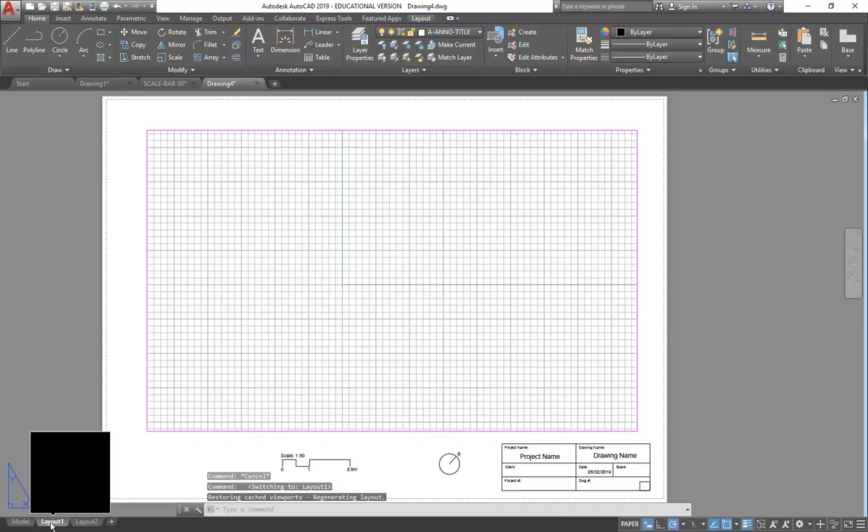Okay, so I've begun my new file with my new template, and so now I'm going to start drawing some objects back in model space. Just so it's clear, I've got the page set up for my template, but now coming back to the model tab, and because we're drawing in model, it'll be one-to-one.

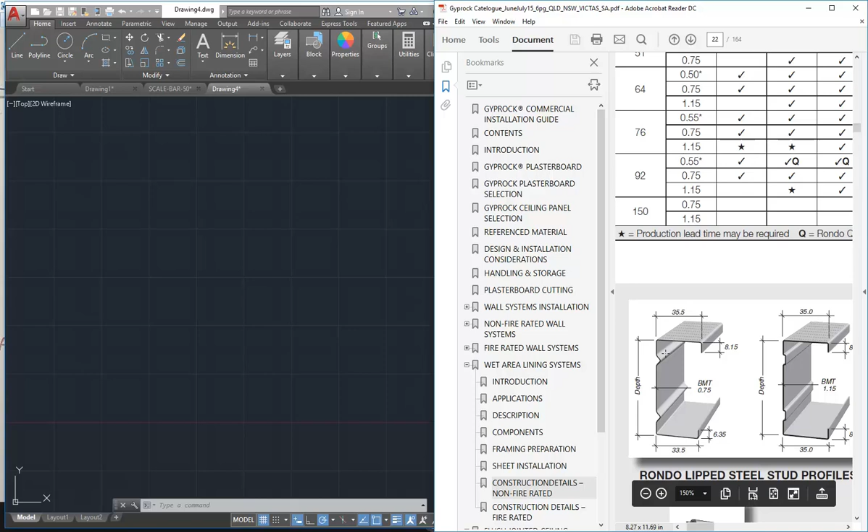Just so I can see what I'm drawing on the screen, I've got AutoCAD open, I'm just rearranging my windows there, and I want to get this stud profile that we've got that I'm going to draw so I can see it, and I'm going to again use that 76 mil deep stud profile.

So I'm zooming in a little bit around that origin, and maybe I'll begin by making sure I've got a layer for this. We'll call it - we've got a wall stud already, actually that's fine, but I'll make another one, a wall stud PBD, right, for plasterboard, and I'll just make that a colour that'll stand out.

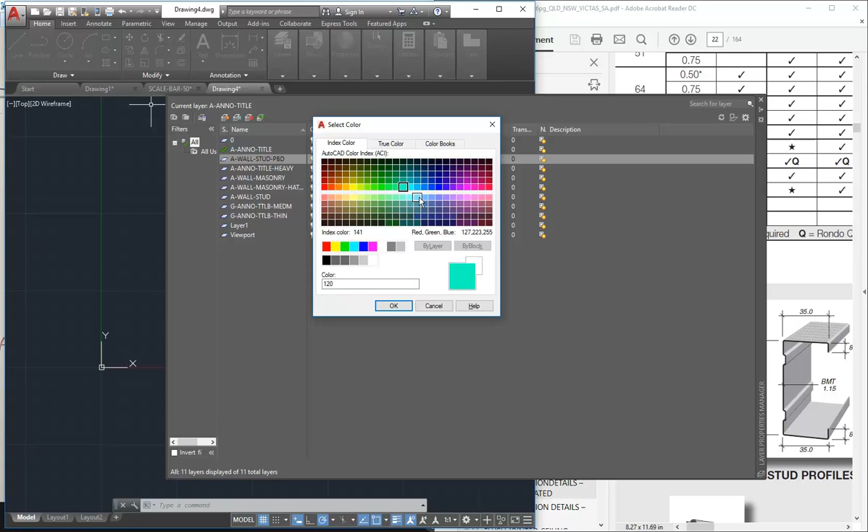Always forget the colour for plasterboard. It's one of these colours, I think, lavender or something. And then the line weight 0.35 should be fine. So that's enough for my studs and my stud wall.

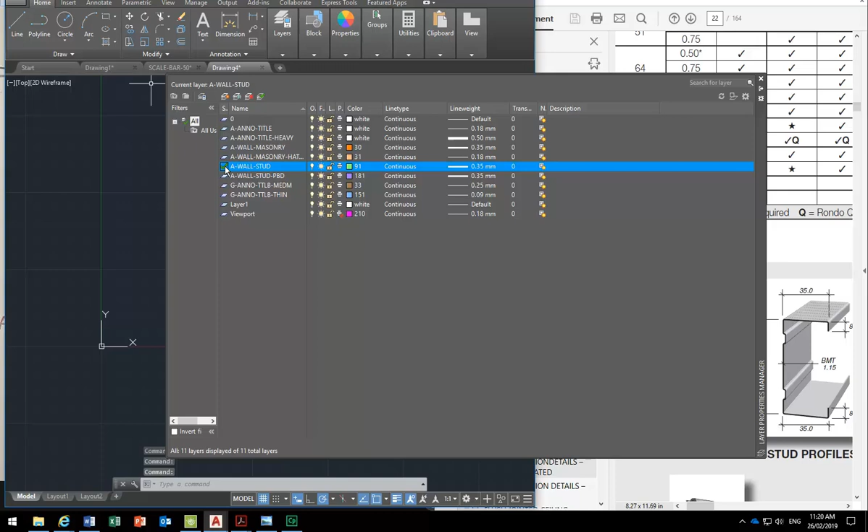And I'm going to change the wall stud layer to draw my frame. Yep, a little bit now. So, okay, I'm going to draw this profile and then make that into a block and add the lining to it. So I'll draw maybe I'll start with a rectangle, again just to keep it simple.

Click a start point and then type in the overall size that I want. So it's 76, comma, 33.5. Now, that's fine, it's the size it needs to be. So whenever you're drawing here, you're drawing one-to-one, in other words, the real size of your object, not worrying about the scale of the drawing.

And then the thickness of this, if we wanted to be technical, we could put that in, but you can see it's 0.55 of a millimetre. So there's no point drawing that in, up to 1 millimetre. Our line weight will be thicker than that, so there's no need to draw things that are that thin, anything less than a millimetre.

Do you still follow the convention of putting in section that's thicker than the rest? Oh yes, so that's right, thicker line weight. So we'll have a thicker line weight for this layer, and I already have 0.35. For details, I might make that line weight a little bit heavier, that's all.

Yes, I'm going to check that that's the right layer. So this is, no, that's actually the right layer, so that's the one I want to use. I've got another layer for the plasterboard. We can call this a wall stud metal if we wanted to. So, it's a steel stud, in case you're wondering - it could be aluminium in some rare cases, but generally steel.

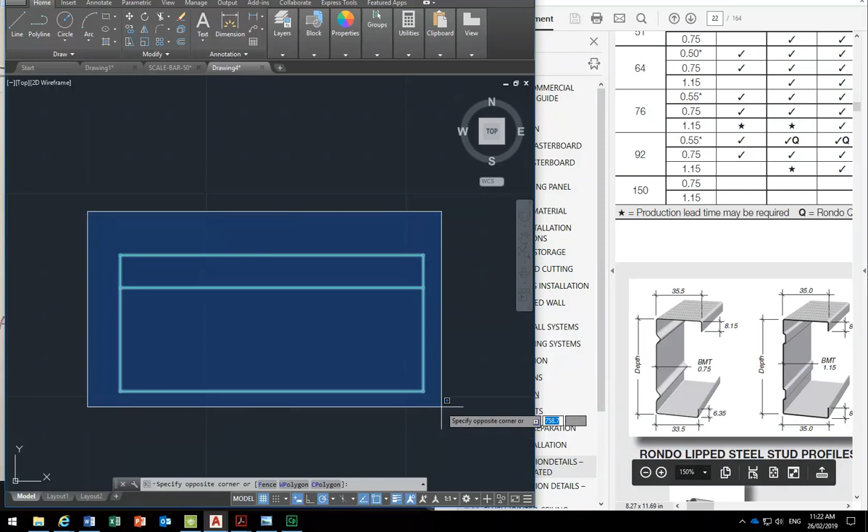So I'm not thinking right, but in fact I'm going to rotate this just so it's clearer. So I'll select that and just use rotate and bring it around 90 degrees, or 270 is fine. And then I've gone the wrong way. Now I knew I was being stupid.

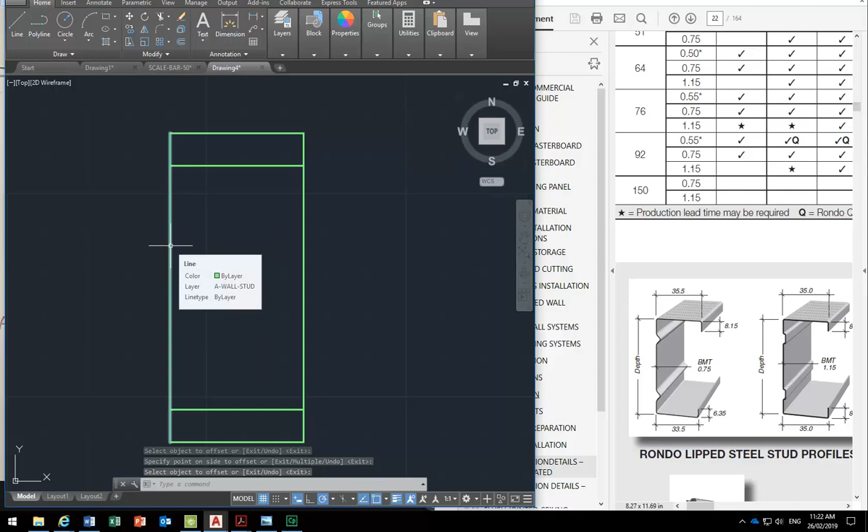Okay, so offsetting again, 8 mil, and bringing this line at the top down and the one at the bottom up, of course. Then to get the little, sorry, 6.4, yeah, I mean, don't worry about it again, they're not going to build it from your measurements. This is just a drawing, so yeah, if you want to do it symmetrically, that's fine.

So I've just done them both at 8. That's fine. Yeah, I know the other one's 6, but that's fine if you do them the same.

And then I will draw, again by eye, a line for this little ridge here. I want it to start somewhere on the line on the left, but you can see it's trying to snap to the midpoint or the end point.

So you might know that you can go and turn the nearest option on. I'll show you that if I turn nearest on in my object snap settings, then I can hover on the line and it will draw from the point that I click on the line, which is useful in these cases.

The problem then is if you leave nearest on all the time, it's going to keep snapping to the nearest point on any object, and normally you don't want that. So watch out for nearest. Don't leave it on as a running snap, in other words, don't leave it turned on all the time.

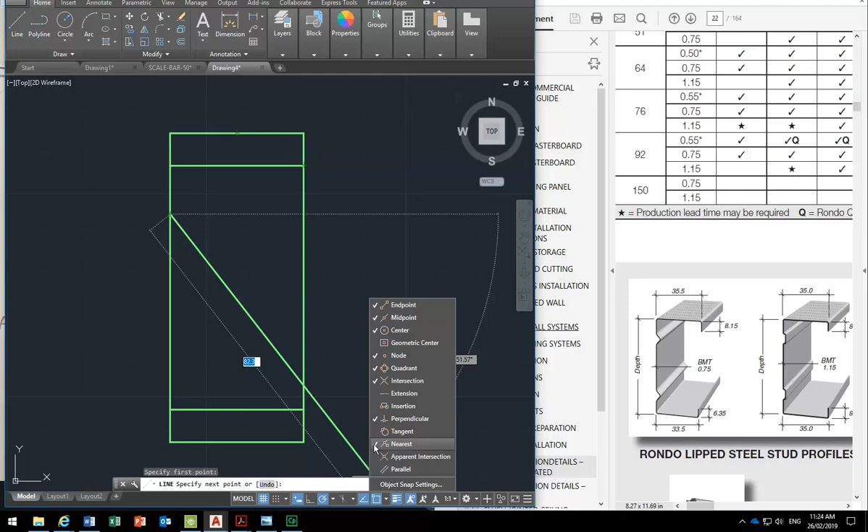So I'm just going to again bring this down by eye, and that'll do.

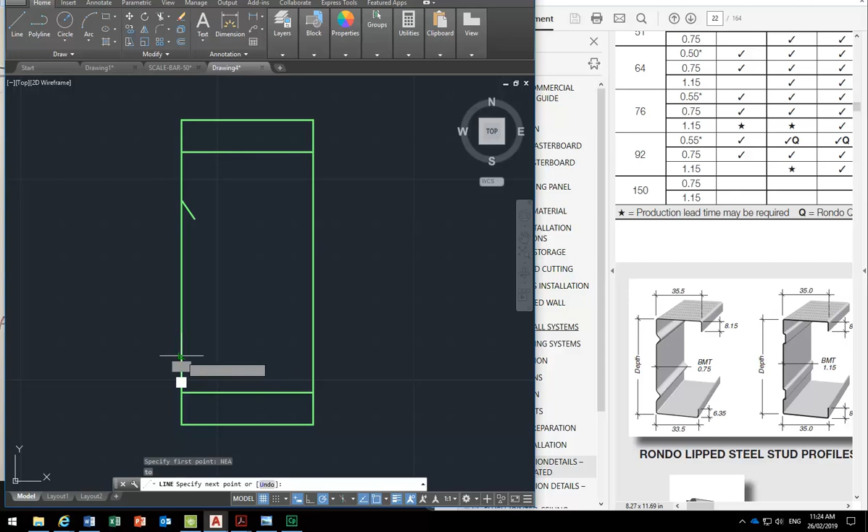I'll just show you, if you're wanting to use nearest and you don't want to have to turn it on and off down here, you can just, as you're drawing, type NEA, enter, and then turn it on as a one-off setting. So that's just gone on for that click, and now it's back to the way it was. So NEA, that's a handy one.

Having drawn that line, I now still want to adjust that, again just eyeballing it to try and make it look similar to what I can see in the drawing there. Don't want it to be too big. That looks about right. And then I'm going to use mirror.

So I've selected the line, I'm going to click mirror, and I'll bring that across. And yep, that'll do. So then I want to fillet this with this line on the left and also with itself.

So to do that, I've first got to use trim. I'll just press enter and then pick in between to break that.

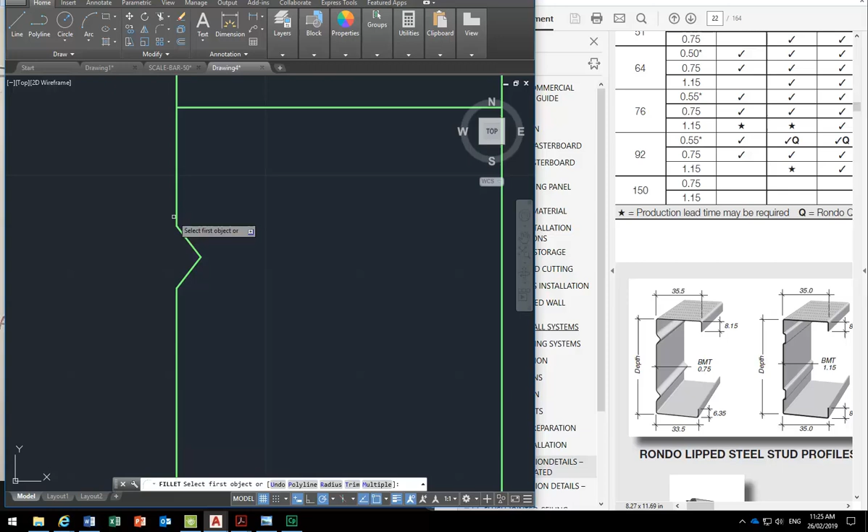And then using fillet, well firstly I'll just do a little thing. I'm just going to do it using trim. I trimmed it. So the trick, if trim isn't working for you, I might just do that again because it can cause problems.

So the trick with trim: after you click on that tool, press enter, and that'll make everything cutting edge. Yeah, that's pretty much it. So yeah, enter is your best friend with AutoCAD.

So then fillet needs to have a radius, which I've just worked out by doing some little measurements on the screen. So I'm going to type R, or click on the radius option on the command line, that's the same thing, and I'm going to make the radius 1.

And then choose these lines, and it will round them off. Actually, that's a little bit small. So I'll undo that and I'll do fillet again.

Yeah, oh yeah, so again, R for enter, R for radius, and I'll make it 2. I know it seems like a little thing, but we're going to use this stud all over the place, so I just want to make it look pretty.

And there we are. Now that last radius maybe there, that's a bit big. I know I'm being picky, but again it's worth making it look good. So again, setting the radius, I'll make this one 1. That's better.

So I've done the first one. I don't need to do the second one again because I can just select this now, all of those lines. Notice I went left to right to get just those lines inside my window.

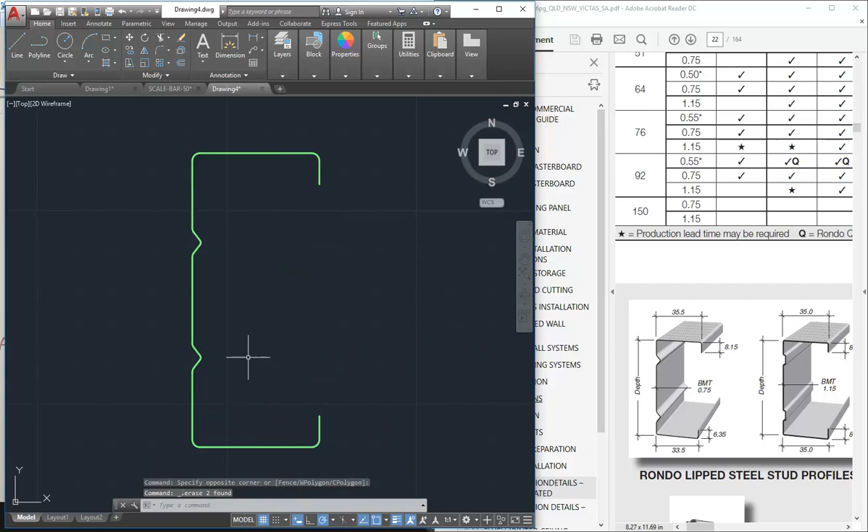That can now be made into a block. I'll select that stud, type B, enter, and put my good old CC, stud, and the size, so it's 76 by, exactly, so we'll say 33.

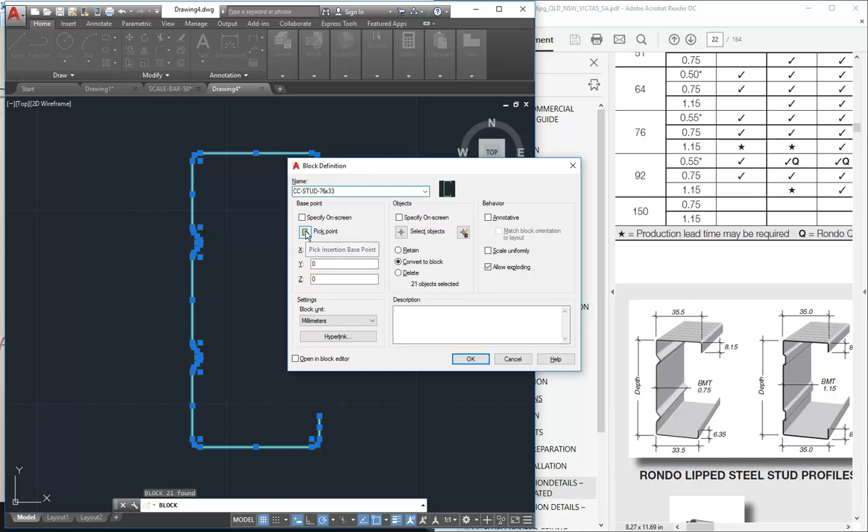That's fine. It's really important that you click pick point to choose the base point. I'll click there, and I'm going to use a little trick here. I'm going to hover over this line, but not clicking yet. Then I'll hover over the line on the left, the vertical line, again without clicking. Now I'm going to come down to the corner here, and it's found the intersection. Yeah, that's right, exactly, because that's the point we want to use to place our stud.

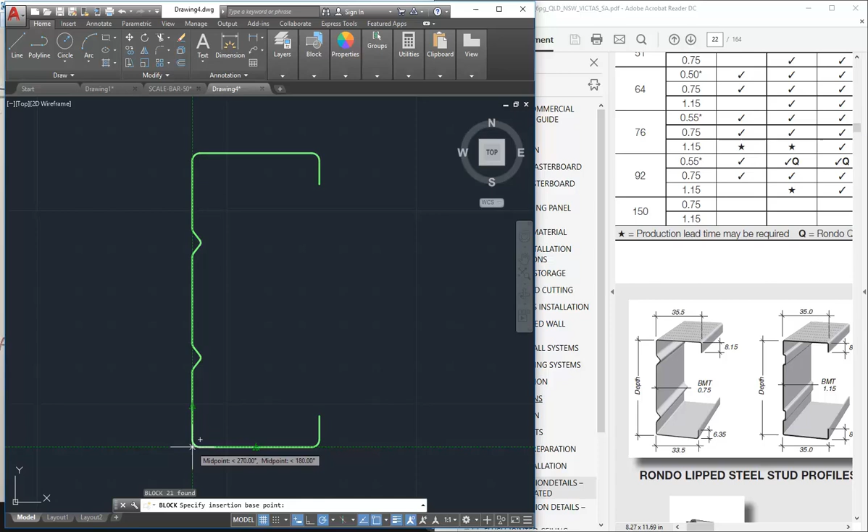So, B, B for block. That's it, so I'm going to click to get my insertion point. It's on convert to block, so I'm happy with that. I'll click OK, and then I'll test it out.

So I might even just delete that, and then come back to the base and draw in a, well, I might even go and make a layer for my floor now. So we'll call it A floor conc, the concrete, of course.

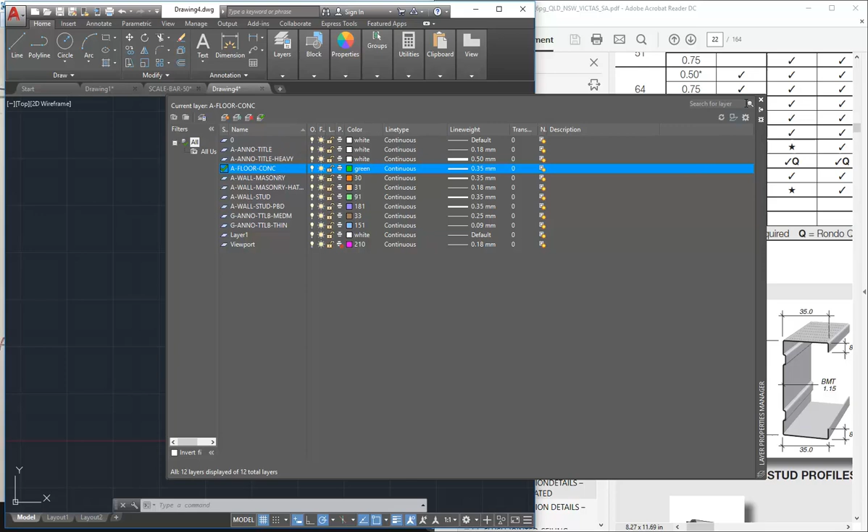Yep, sure, no worries. Okay, so I've got my floor layer just so that I can draw a line across to represent our concrete floor that the stud would be attached to. And then I'll go and switch back.

Even though blocks, the lines within a block are on a layer, it's still good practice to put blocks onto a layer as well. So I'm going to change to my wall stud layer, and then go and insert my stud block. There it is.

And there, well, I'm happy to use the midpoint. We could use a nearest point. Just want to get that onto the floor, and then I can.

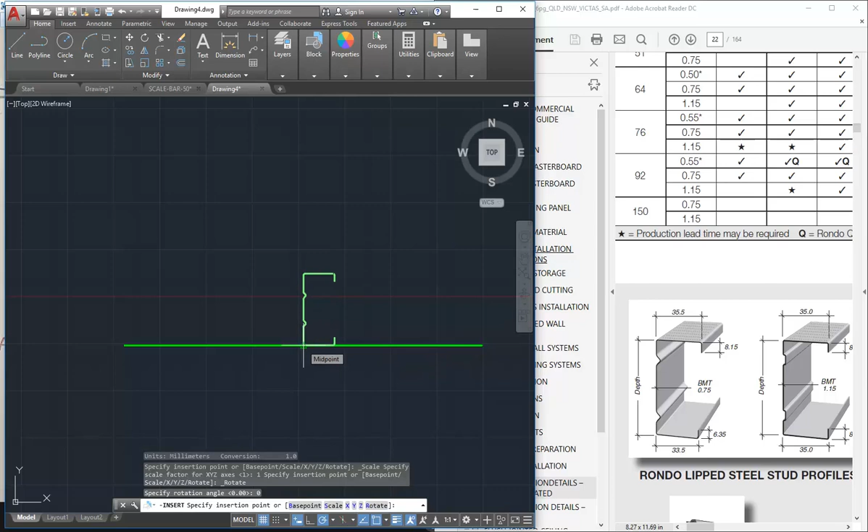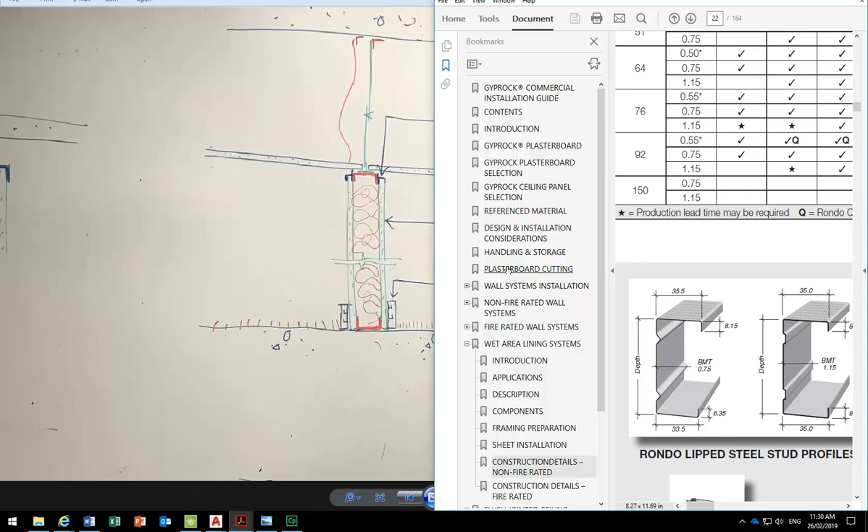Yeah, well, you've got to check your detail to see. So yeah, you can raise it up a little bit. There would be a, what do they call it, a membrane, it's here. We'll go and have a look at the detail quickly. Let's look at this one.

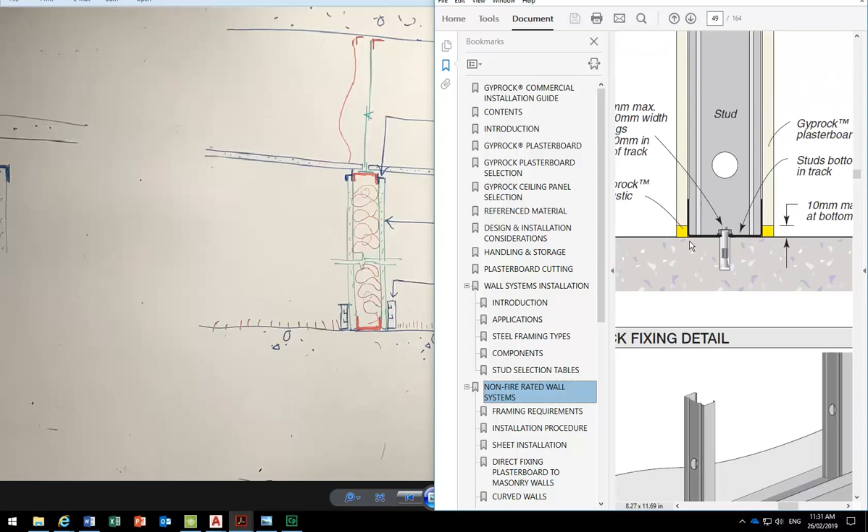Well, yeah, but you don't really need to draw that. You can just leave a little gap though, just so the lines read separately. But I mean, this is a pretty standard installation. There's sometimes some sort of, I forgot what the word is, but there's a base plate essentially they'll sometimes have for the stud to sit on. But it is actually, I've built stud walls myself, and when I did them, I did it like this with Dynabolts attached directly to the concrete, so that works too.

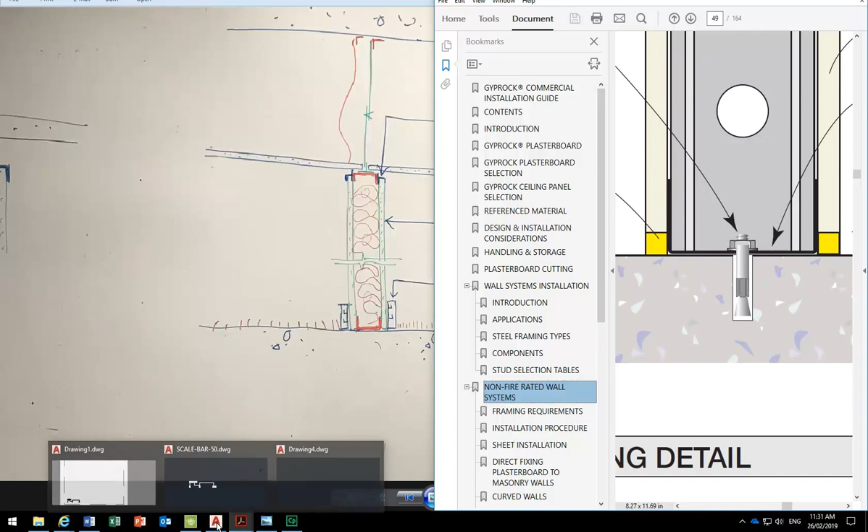You've got to raise it up about a fraction of a mil so that it's not on the line. Yeah, maybe even just like a millimetre or two. So that works. Coming back into here though, into AutoCAD drawing.

Okay, so going back to insert it, I'm going to go to more options, just so that I can make sure that rotation option's ticked, so that then as I'm placing it, I can rotate around 90 degrees.

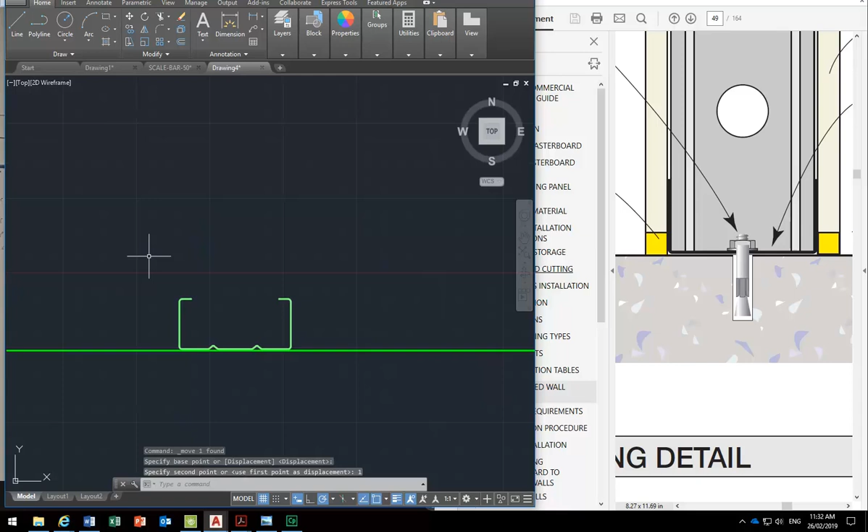And then if necessary, you can just select it, click move, click a base point, and then move it up, a millimetre, probably is enough. And then put your lines in for the plasterboard, other side.

So we'll come back and finish this off next week. You can always have a look at these details though and try and do that yourselves.

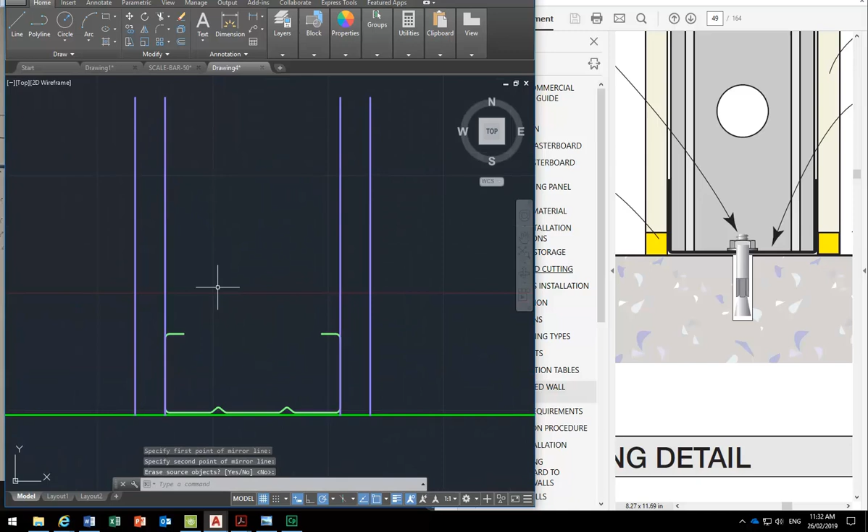And so for now though, I'm going to extend this line down to the floor and then simply offset, so you can all do this, offset 13 mil, and then maybe use mirror. I'm just typing shortcuts here, MI, and flip over the middle of the block, and we've got a starting point on that detail. So, let you try that.